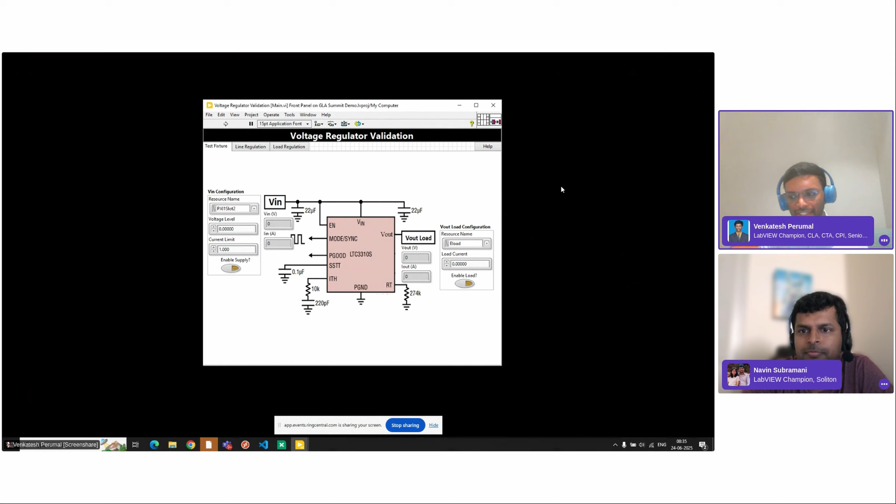So like Navin was saying, we can build some interesting applications in LabVIEW. That's what we have been doing for a couple of decades since LabVIEW came out, and we have always found it exciting when LabVIEW can talk to instruments, make some measurements, and then help us plot all the graphs and charts, log, and do all the exciting automation stuff.

But there is always a question. Let's say we have a simple application in front of us. I start running it. It's about validating a device. So, a few questions that we usually get when we start using an application, which is basically validating a device connected with some instruments and things.

What values do we configure to the device? For example, here I have a voltage regulator. I need to give an input voltage. It generates an output voltage, as simple as that. But I have a power supply connected. Maybe the first few questions that we get is, okay, how do I know what is the input voltage range for this device? Yeah, interesting.

So we generally go to our device data sheets, a bunch of pages. We read through and figure out what is a proper value that I can configure. And then it doesn't stop there. We would have so many settings. If something is not working well in our application, we again have to reach out to someone else in the team, or go through a bunch of documents, understanding and finding out the answer. But how about our application is a bit more intelligent in helping us find the answers?

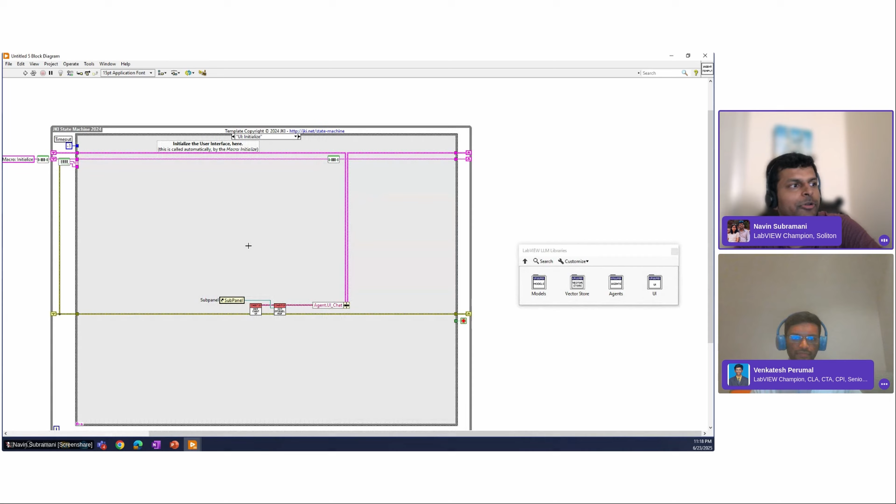The user interface is very simple. It takes a subpanel reference in, so whenever we run it, it loads the HTML UI in the subpanel, and then destroys it. Whenever there's a message, it just adds the messages to the user interface.

Agent initialize - this agent requires a large language model as an input, as well as a vector store. I'll talk about the large language model a bit later in the session, but assume it requires one of the large language models. At this point, as you can see, OpenAI is configured. So it takes OpenAI as an input, initializes the agent, and whenever a question is asked, question goes in, answer comes out. We are asking the model.

A very simple thing - what I'm going to do is just open the front panel and run it. It's going to throw an error because I wanted to save this so it can load my OpenAI keys from the background. Let me stop this here. I'm going to save this.

Okay, so I tested this four times before the session this morning. So I'm going to say test five. Hope it works now. Okay, I ran it, let's see. I'm just going to say hi. No, something is not right.

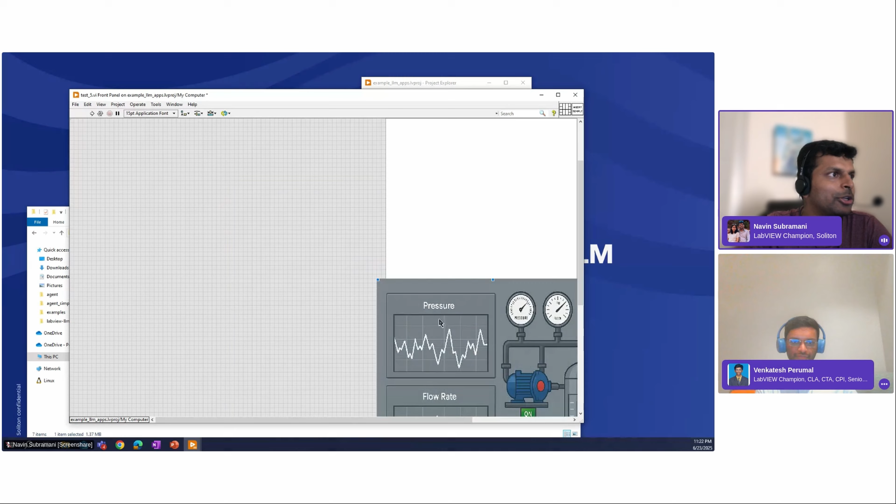This is an image from ChatGPT, but the imaginary application we're going to work with today has three pumps, a water tank, it throws water into the tank, it has pressure and flow sensors, and it has a graph. This is my application for today.

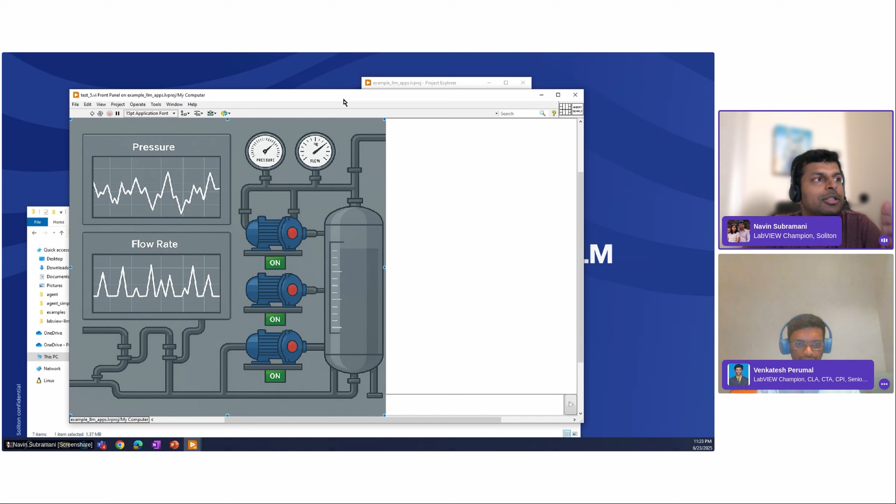Now I want to start asking questions about this application. My agent does Q&A. I'm going to open a block diagram and show this particular part specifically. Whenever I ask a question, it answers based on the model's data.

So we have two options you can toggle between - either you can ask your model or ask your data. It's a small toggle, I'm going to move from ask your model to ask your data. Now whenever I ask a question, instead of the answer coming from the model's pre-trained knowledge, which is OpenAI's trained knowledge, it's going to answer based on my data.

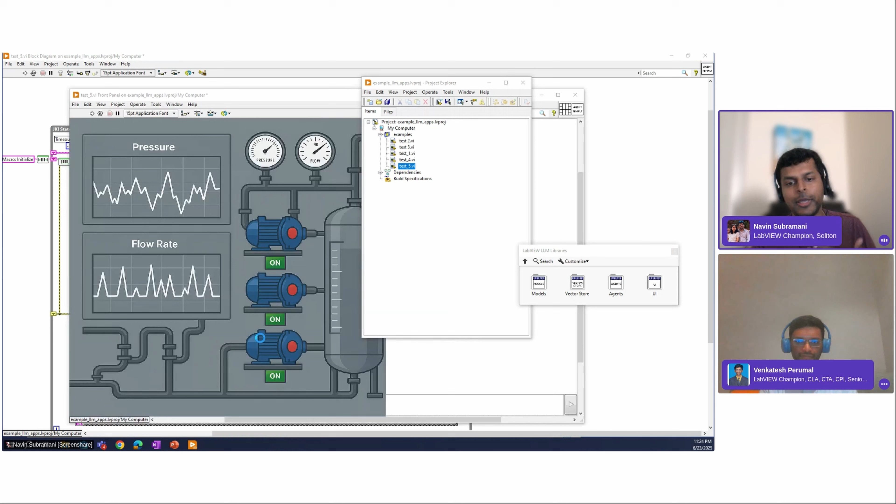The data about this particular application. Now your question is, all you did is swap to ask your data, but where did you tell it your data?

So that's where this agent initialize comes in. During agent initialize, we have this array of string control - it's an array of sources. It's just expecting you to provide a source as an input.

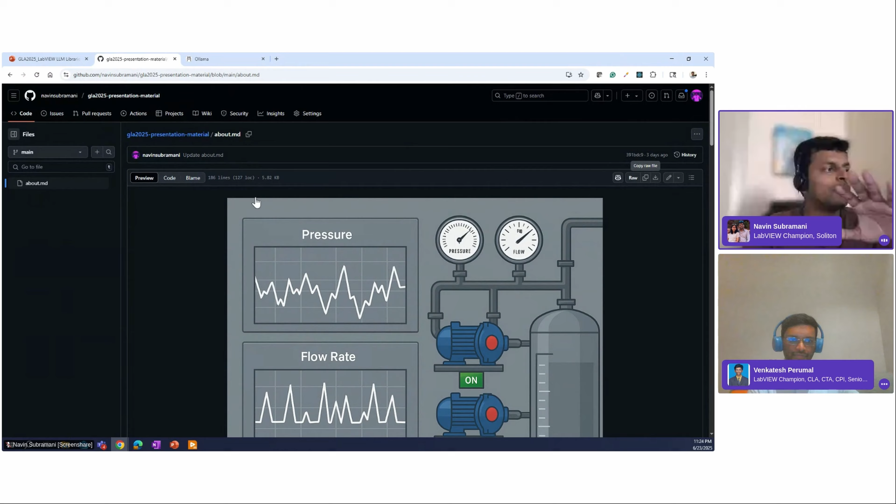Today I have the documentation about my application on GitHub - it's a public GitHub repo I created for this. I said this is my application, and asked ChatGPT, can you give me a user manual for it?

It made up an application overview, system components, pumps, data storage tank specifications, graphical user interface experience, and so on. It gave me a user manual for my imaginary application.

So I wanted the system to answer based on this imaginary user manual - it could be your application's user manual, but at this point it's imaginary. So all I'm doing is copying this link, Control C, and then pasting it here, and opening the front panel to let it save.

I think my machine is pretty slow today. Okay, it saved it. And I want to click run.

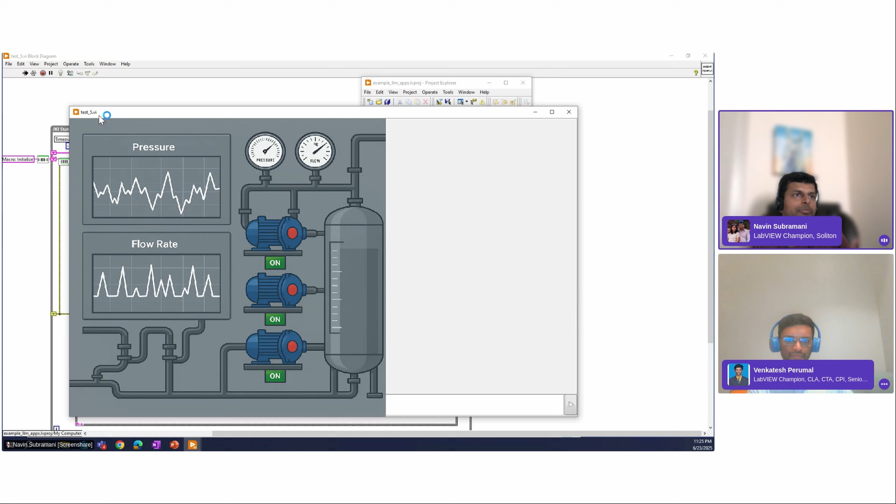Now what happens is when the application starts, it's going to pull the data from my GitHub and do some data preparation, so it prepares my data. It's a one-time process - you can do it every time you start the application, or choose to skip it if you want. Essentially it starts embedding, so let it embed the data. It takes a few seconds to do this. Once this completes, let it complete.

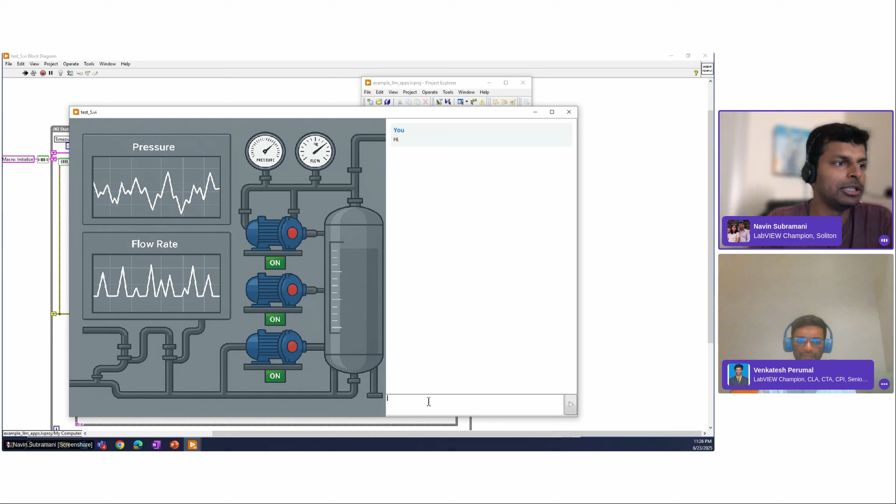Once it embeds the data, my chatbot has that knowledge to start answering questions based on the data from GitHub. Now I'll just check if it's alive. I always ask 'hi' - if it responds back, it's live. It says 'Hey there, can I help you today?' Great, I'm going to ask it back what can you help me with today.

So based on the knowledge it has, it says 'I have information about fluid management systems along with your contact information.' How can I assist you regarding that? It's like user manuals and technical documentation.

So that's fine. What I want to know is: what is the maximum pressure for the pumps? And it comes back and says the maximum operating pressure for the pump is 10 bar.

Because if I go back to my documentation on GitHub, somewhere under pump specification, it should be right there. Yeah, 10 bar - maximum operating pressure is 10 bar. Okay great, so it was able to find it and answer it.

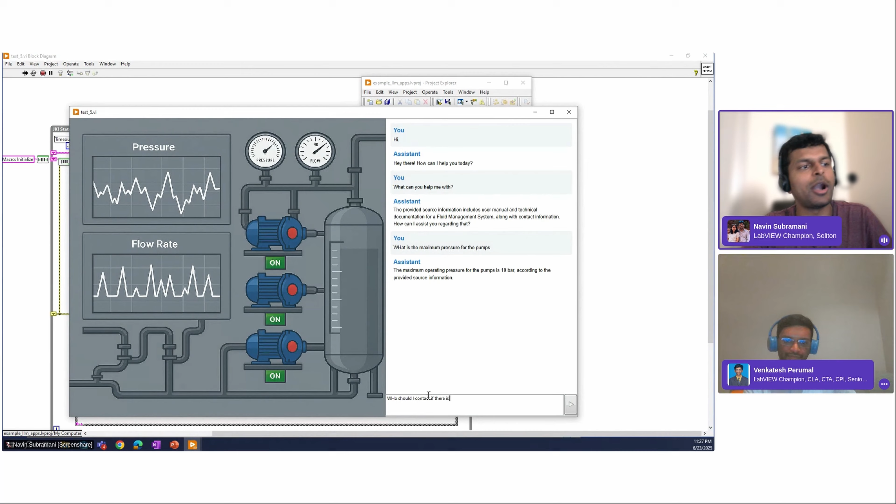Again, I can go on asking, like, I have an issue - who should I contact if there is an issue - and it keeps answering. Now all I did is, still it's a three-case structure coding, but then I just pointed it to my specification data, so it was able to answer.

Great, it also gives me the imaginary pump company - I mean, I said it's an imaginary pump company as the name of the company, so it's right, and an email for it. So this all is good, right?

But everything you see here now is very reactive - I ask the question and it provides me the response. But you can actually take it to the next level, make the system more intelligent, more proactive.

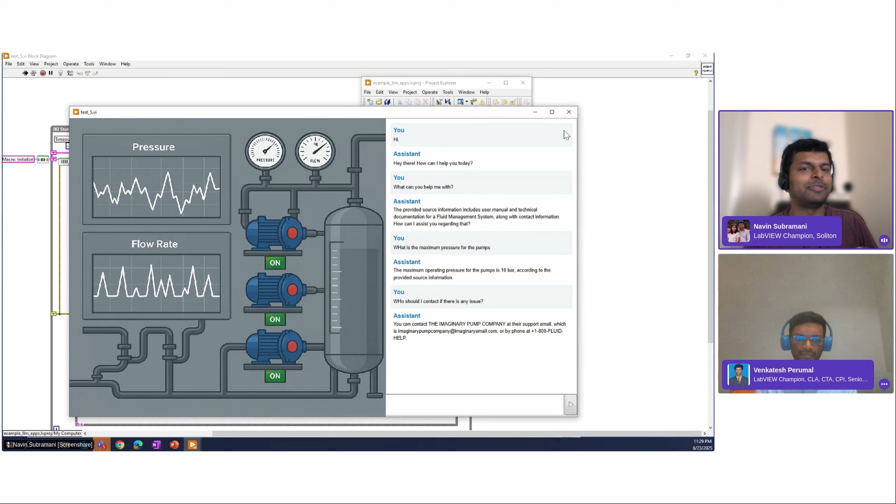Whenever there are key events happening in your application, you can make the chatbot respond to those key events. For example, a key event may be an emergency shutdown, or a calibration record being off, or a very common event - an error event. When there's an error event, you have to have the bot proactively tell you what happened. Because most times people find an issue and come to us telling us it happened. But what if there's an intelligence sitting in my application which can actually help answer it?

So let's try to simulate an event and code a little more to see how we can make this bot respond to this event. Now...

I'm going to create a boolean here which is going to trigger an event - I'll call it 'simulated error event.' I think I have to restart my LabVIEW, it's pretty slow, I can sense it. Not sure if it's because I'm sharing my screen, but anyway.

So I'm going to color this thing red and color this guy green. Just, this looks like green. Okay, I'm going to drop it here on the pump, and then let it save. Even a save takes a bit of time.

Okay, I have a control here, I'll change it to control, and I want to create a simple event. I'll just duplicate the panel. So I have this bad habit of duplicating from something instead of creating from scratch, because I get something for free on the screen. Just need to ensure I delete this.

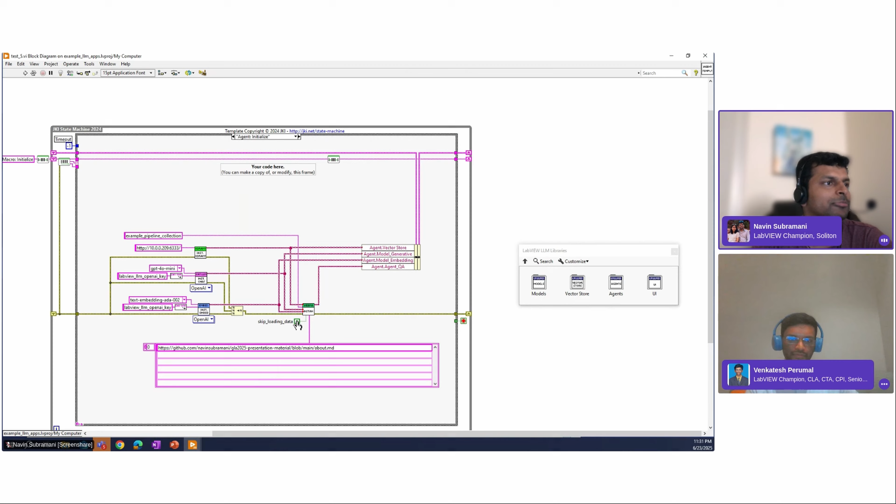But before that, I'll just disable loading this data from GitHub - since it's pulling the data from GitHub every time, I just disabled it, so now it uses the data I pulled last time. So now I'm running the application. Let me quickly test this thing out. All right, I think the system is up. As usual, I'm going to ask 'hi'.

I think there's a problem. It takes a bit to initialize something in the backend, so I'll give this a time. If this continues, I will probably restart my LabVIEW. Okay, first time something is taking time to load. Anyway, whenever there is an error, the point is I get an error message.

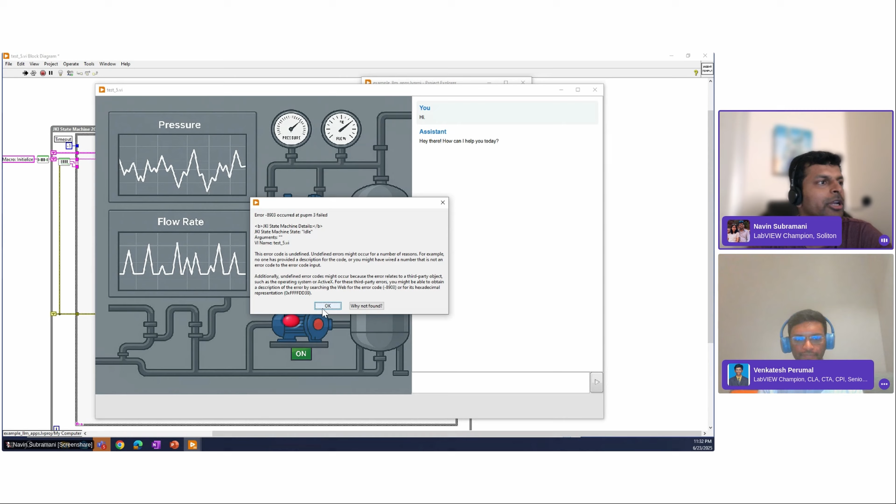Okay, great. Now I'm going to make this a bit more intelligent. In this error handler, I'm not going to throw a pop-up. Instead, let's actually trigger AI to respond based on what the error is. So under models, we have this message API. Instead of creating a text message, I'm going to create an error message. I'm going to feed the error in to the create message.

And then let me just bundle this into the latest message, so this actually goes to the agent ask. All right, done. Now, whenever an error comes, it creates an error message. Very simple thing. One, I'm going to display that in the user interface. Two, I'm going to do an agent task. To display in the user interface, all I want to do is call UI update chat message. So error handler, UI update chat message. To trigger an agent task, I'm going to do agent task.

Now, whenever there's an error, it just adds a message into the system, displays it in the user interface, and asks my agent about this error, right? Because it's a create error message event. But the problem is, I don't have any details about the error in my data, right? Because it's a user manual.

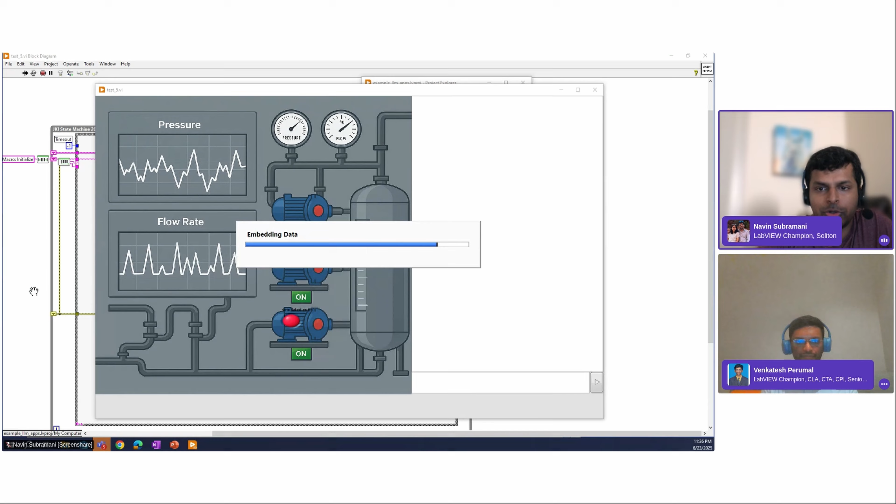So where does this data get stored, Navin? That's a good support question. All these data are stored on my local machine in a vector DB. A vector database is a database that takes all the information and vectorizes it. You can think of it as storing information in an AI-friendly way, in numbers, so that AI can understand your data.

And there are a lot of vector stores out there. There are vector databases that work at scale. Since we are only using it for one application, and that too local, you don't want scale, right? So you can use simple vector stores that are lightweight. Currently the vector store that I'm using is Qdrant, but there are other file-based vector stores which do not require any installation as well that you can use. Nice.

And I'll actually show you the libraries for the vector store, because it's a plugin-based system. You can create vector database support for any vector database. Today we have support for Qdrant. All you do is create a class, inherit from the base class, and override certain APIs to create your own vector databases. But we support Qdrant at this particular point.

I'll just check. Hello.

Yep, the guy is there. So now I can actually trigger the error. Once the error event happens, you can see the bot activates and then it says, hey, I see there is a pump 3 issue. It could be because of internal motor fault or communication failure with the pump controller. You may want to verify wiring and control panel connections.

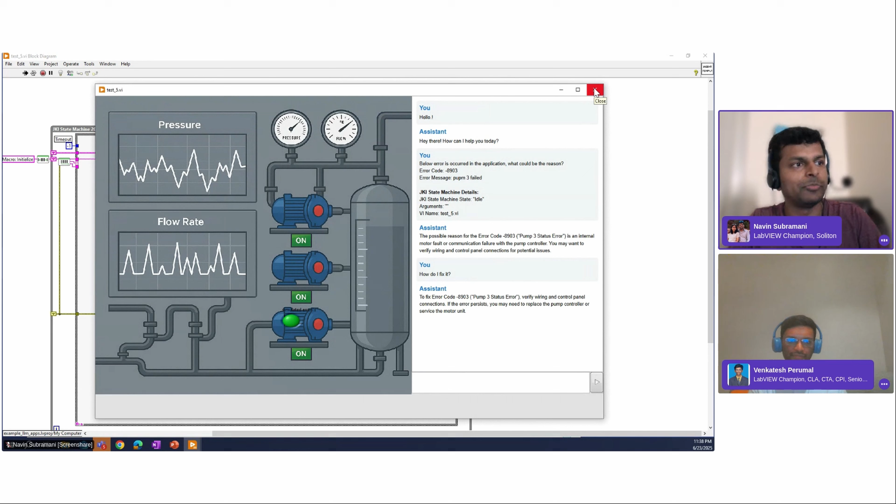Now, I was expecting a question from the chat, which is, "Hey, you're using OpenAI, but my data has to be secure. In my company, we have our own AI policies, right? How can I use it using probably local large language models? How can I ensure the data sits within my computer, right?" So again, that's something that everyone asks us.

So typically, companies and organizations partner with one of these three big cloud vendors like AWS, Azure, or Google GCP, and they get Azure OpenAI, AWS Bedrock, or Gemini large language models from these vendors. If you don't have an AI policy where you are approved to use OpenAI or Azure OpenAI or Anthropic from Bedrock or Google Gemini, and you are only approved to use local large language models, we have support for something called Ollama.

So this is a quantized large language model that you can actually install in your computer if it has a GPU. My computer has a GPU. It's a GeForce RTX, I think 4070. So I can run a quantized model in my computer. If not, you might have a server in your company where you can run this as well, right? So we have plugins for all these different large language models. We have a suite of commonly used large language models.

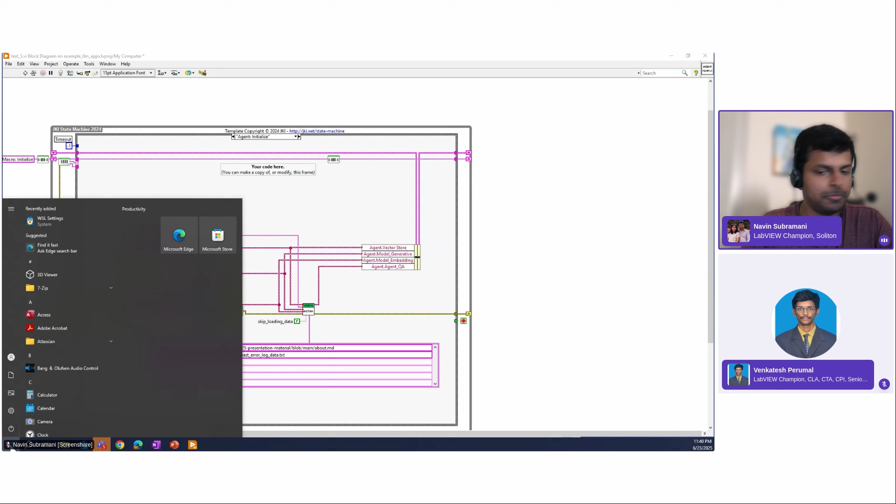Oh, I think we have only 5 minutes more. Okay. Let me try to be fast here.

Ollama. So the list of models is ollama list. I just need to know the spelling of my model. So it's going to be Llama 3.1 latest. Okay. So I'll just say Llama 3.1 latest. I think I'm right. Llama 3.1 latest is my model. So yeah. Oh, did I really change a different one?

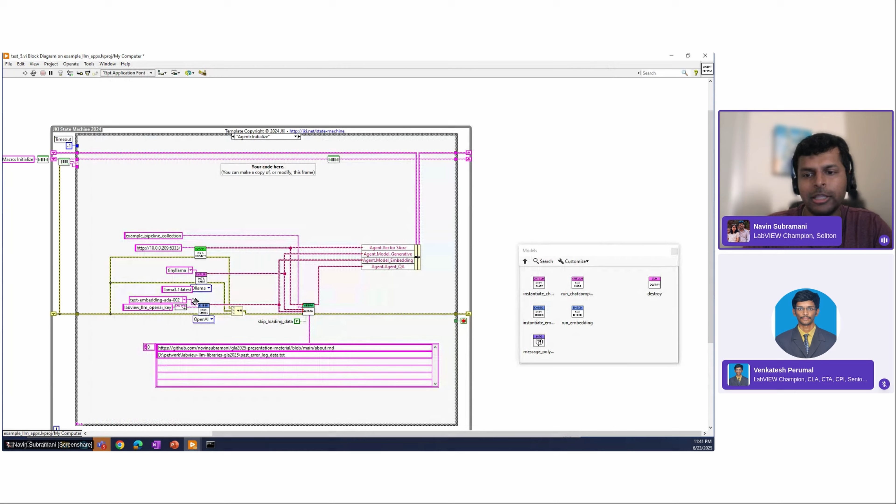Oh yeah. But given the time, I'm gonna skip it because I know it takes a few seconds to run. All I have to do is feed this in the right control and tell the server where it's running. In my case, it's running in a local server, so localhost works. And then when you run it now, it actually runs with your local large language model. I can prove it by disconnecting the internet, but the call gets disconnected, so I'll probably not do that. But you can trust it, right? Or you can try it offline as well. But that's kind of the idea, right?

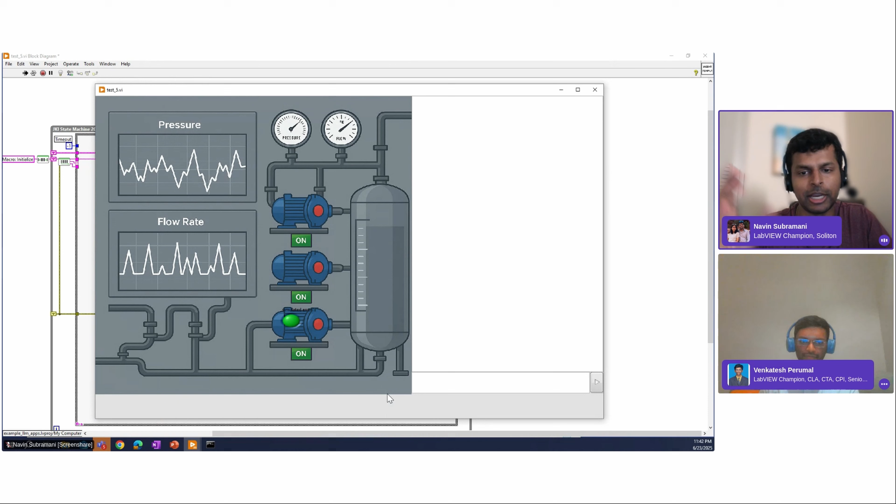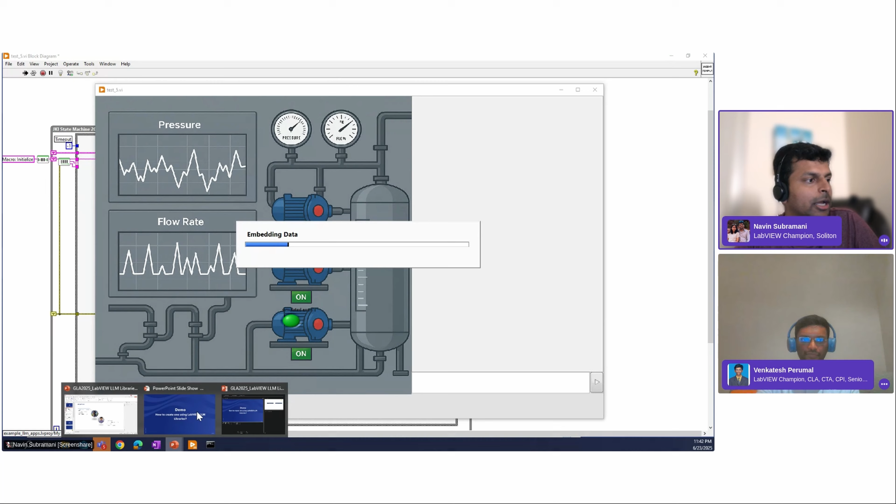You can now have an agent that's agnostic of models. You can use online SaaS models, or you can also use local large language models and build your agents and applications. Anyway, on a high level, we want to show how you code or create agents and use agents from scratch to develop an application. I will let it run. It loads. You can trust me. So what you have seen now is we had agent collections and user interface collection, out of which we had one agent.

We showed one agent, which is a Q&A agent, and LabVIEW chat user interface. Again, it's an open source thing. There's a lot of things that we can improve on here. We can optimize a lot. We can improve the performance, whatnot. We can make the chatbot look very cool as well. You can show the links of the documents in the chat interface as well. So all these things are up to us to improve based on the priorities.

But we showed you one example of an agent and a user interface. You can create your own custom agents as well. And we've also seen how a Q&A agent can work in two modes, which is an ask your model mode and ask your data mode. There is a lot of things that this library does. We haven't gone into the models and data side of it. We just showed you, here's an agent, how a LabVIEW developer uses an agent in an application.

But if you are interested to create your own agent, you might need some basics of generative AI. At that point, you would need a bunch of models, and you need to have libraries that prepare your data to build a good agent. So we have some libraries that parse data and provide it to the agent, as well as a suite of abstracted model libraries. So you can actually swap data, swap models, and make your agents a bit more agnostic. This is something we will try to cover in different sessions, as it's a bit involved.